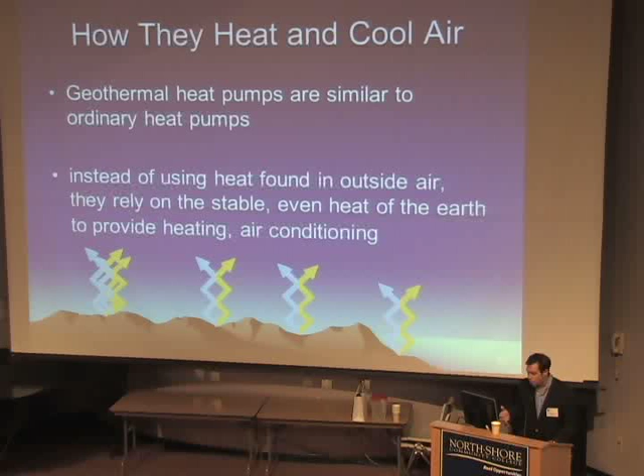You all are familiar with the frost line. If you've had anything installed below the frost line, an irrigation system, the temperatures below the frost line aren't subject to the same extreme stress of temperatures from the surface. So they're very stable, and they tend to be in this area about 50 degrees, about 10 degrees Celsius. So rather than bringing air from 0 outside to 68 degrees, and again, you can imagine the amount of energy that would take, we only now have to bring it from, say, 50 to 68. So far less effort and far less energy and far less cost in doing that. So that's basically what we're doing here. And it's also a technology that can use that stable heat below ground to cool homes as well as heat them.

So another added benefit is we talk a lot about burning fuel and fossil fuel and releasing carbon into the atmosphere, and that's a very finite resource, the amount of carbon, fuel, oil, and gas that we have on the planet. This doesn't burn fuel like a furnace, not at all. What it does, as I said in the previous slide, is it collects the natural heat through a series of pipes called a loop. There's open loops and closed loops, and we'll show some diagrams in the next few slides. And these are installed below the ground surface, where I mentioned we have a very stable, even temperature year-round, as opposed to the high fluctuations that we get in this part of the world, at least in New England, seasonally.

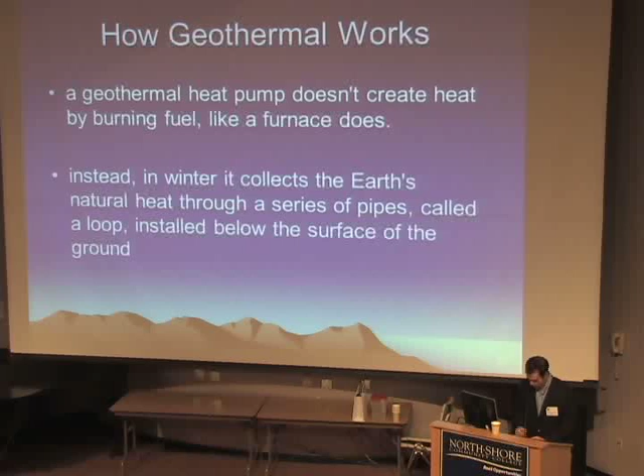So this is more of an overview of a typical system. This is a closed-loop system, horizontal loop, as you can see, installed in a home. And that green line is the ground surface. So if you think ground surface, grass, green line, below ground is where we have the majority of the components of this system. And then you have in the basement of the home the compressor and distribution system as well. And your loop on the right, that brown circular pattern, it's an odd-shaped pattern, is basically filled with a refrigerant, like ethylene glycol, antifreeze, essentially. And that's circulating through the coils. And what it is, it's drawing in heat from the earth and releasing heat as well at the same time.

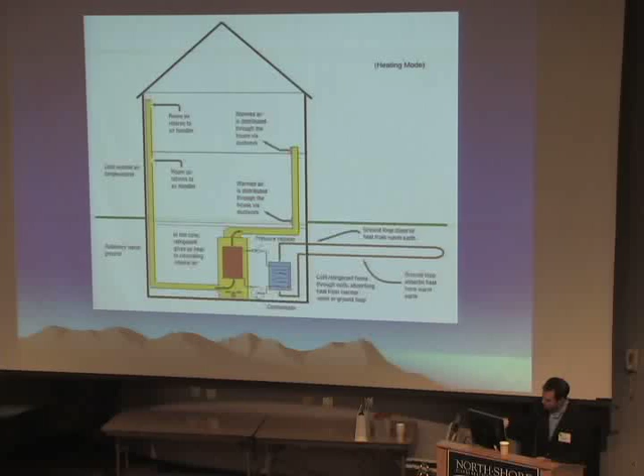Going through a system of compressors and ductwork, air is brought up to temperature from 50 degrees to say 68 or 70, with much less energy than a typical air-driven system, then released into the room and circulated back through. So this is a closed loop diagram of a closed loop system.

Let's try to put together an analog as to how these systems work. A great example is up in New Hampshire, the polar caves. Has anyone visited the polar caves? Yeah, it's fascinating. You can be there in July and there's ice in the cave. So why is that?

Well, it's stable temperature, very cool, year-round. In the winter you'll see a cool temperature in a cave like that, but in the summer it'll stay just as stable. The air underground is constant, cooler than the air outside, less subject to fluctuations. During the winter it's pretty much the same constant temperature, and that's warmer than the outside air. So this is the basic principle: you're drawing on that warmth, that reservoir of warmth within the Earth.

If you look even deeper into the core, mantle, crust of the Earth, you can see expression of that heat through geysers, volcanoes, some huge processes. We're not talking about that geothermal energy, that's a much more macro scale. We're talking about just the warmness itself of the below ground, the subsurface. So we can draw on that for energy, we can use that warmth for heating and cooling.

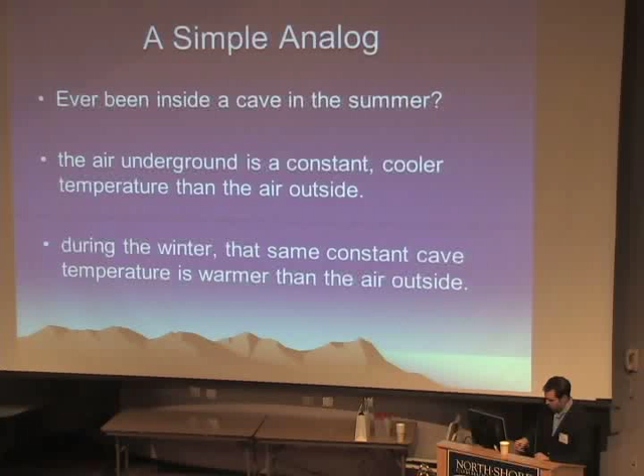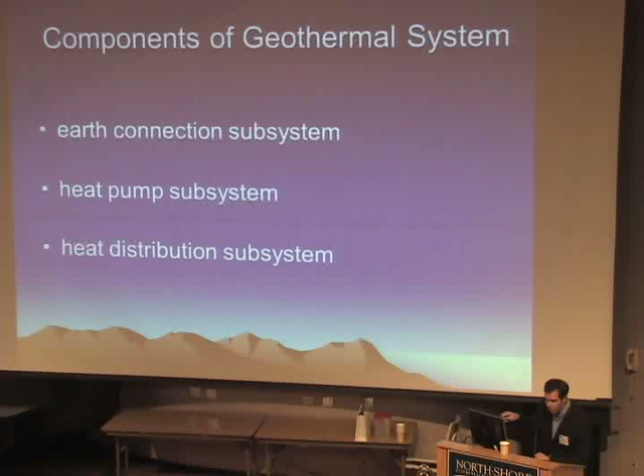So any geothermal system needs to have three components. There needs to be an earth connection, and we showed a loop system in the previous slides, that could be wells or a horizontal system. Then you need a heat pump, a subsystem in the house, and then a distribution system to actually release that heat or pull that cool from the house and circulate it back into the system. So three basic components.

So let's look at the first one, the earth connection. We're using the heat of the earth as a sink or a source. The sink is a release and a source is a place to pull heat from.

And we do that through a series of pipes, which we call a loop, buried beneath the ground near a building to be heated or cooled, to be air conditioned or heated. Some of the temperatures we look at underground could be 45 to even as high as 75, and it tends to be in that zone. Around here we're about 50, 51, maybe a little bit 52.

So it's very constant during the year. And that is really the main feature of geothermal, that we can draw on that constant heat and cool buildings and heat buildings from it, and require far less energy to bring heat up to temperature.

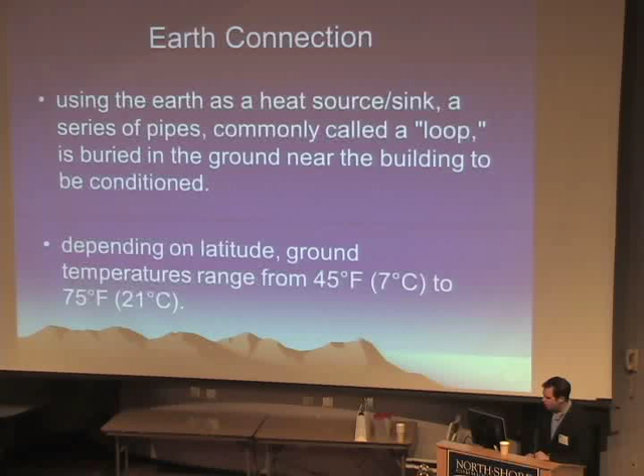So here's a couple of slides of typical systems. And the loop itself can be buried underground horizontally or vertically. You see horizontal on the left. That could be for a typical home, again below the frost line.

And on the right is the system that's installed in the new building here. That is a vertical system where you have a series of deep wells that are drilled, in which you have coils installed in a loop fashion to collect the heat from each one of those wells at depth and then relay it back into the building. So they both are similar in principle of operation, except there's extreme depths involved on the right, and we're talking as much as 500 feet deep with the vertical system.

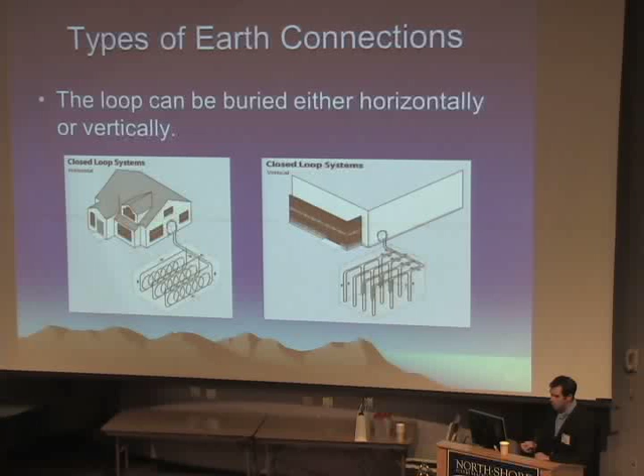As we saw in an overview slide, the basic system uses a fluid. It could be water, but here in colder climates we use an antifreeze, an ethylene glycol, that acts as an absorber of heat or releaser of heat. So we talked about sources and sinks to the soil, and depending upon whether the ambient air is colder or warmer than the soil, that's where we get either release of heat or absorption of heat.

So ambient air is just the general outside air temperature. If I was to say the ambient air in this room, it would be 70 degrees.

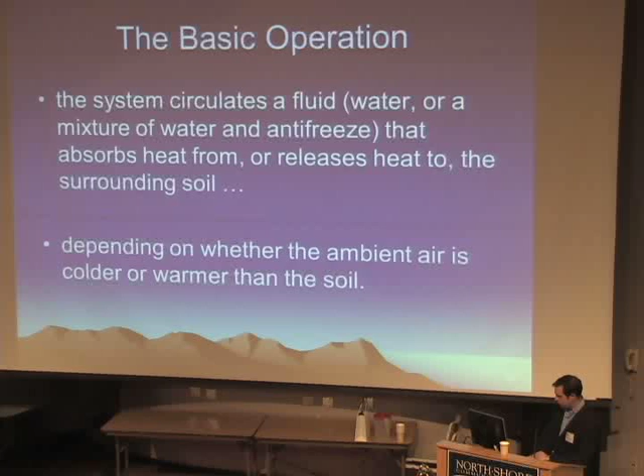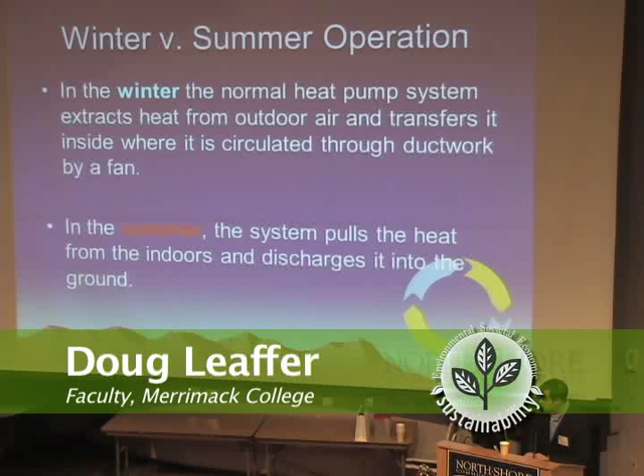So here we have two frameworks of operation. In the winter, we're extracting heat from the outdoor air and transferring it inside, where it goes through ductwork by a fan. And if we have an air-driven heat pump system, we have to crank up the energy to get it from what would be 0 to 68. But with the groundwater heat pump system, we're only getting it from 50 to 68. And in the summer we have the reverse: the system actually pulls heat from the inside of the building and discharges it into the ground. So this is the loop that we're talking about.

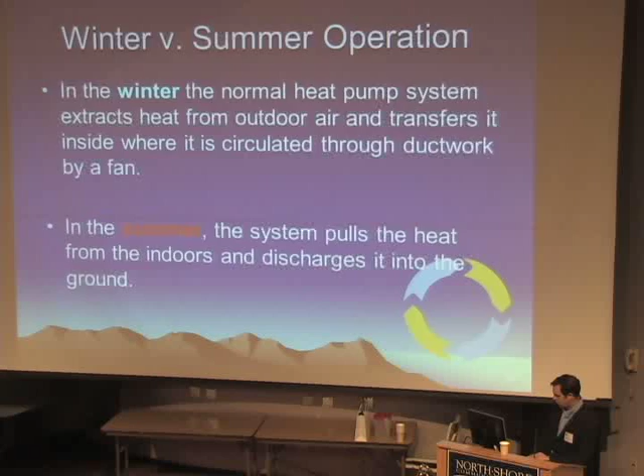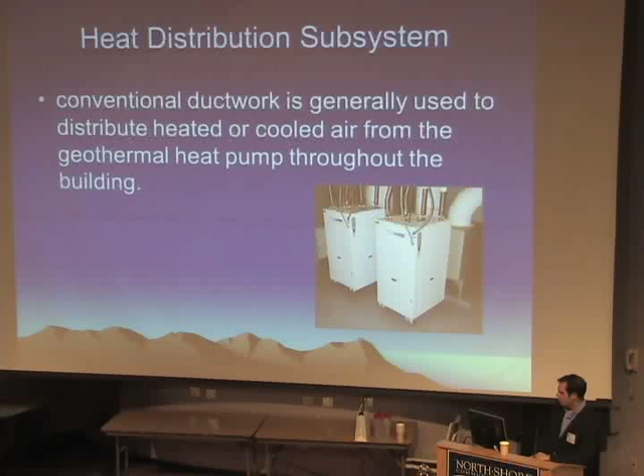What's really important to note is that these are very efficient. If you look at the percentage of energy used throughout the whole system, roughly 70% of that is coming from the ground. That's renewable energy. We're not burning anything, we're not adding any carbon to the environment. It's constant, it's available, and there's no cost to draw it from the ground other than your initial installation cost and your system maintenance cost and electricity required to run the system, but far less than conventional hot air pump systems.

So looking at the Earth's temperature, really that's what makes sense. This is very efficient, it's comfortable and quiet. It's a very sustainable technology. We talk about sustainability - this is a one-time installation, and you have this reservoir of heat to draw from indefinitely for the life of the components of the system.

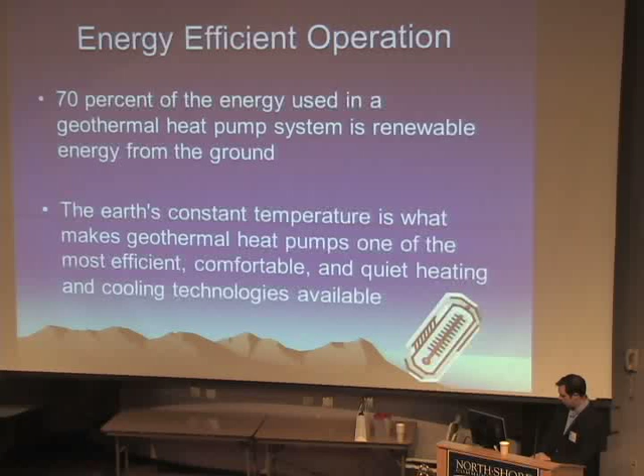So some facts, some statistics. According to EPA, geothermal heat pumps are now listed on the Energy Star program. You've all seen appliances that have an Energy Star rating, which means they have more efficient operation with electricity. Geothermal heat pumps are now rated under that system, and the EPA has estimated that users of geothermal heat pumps can realize some 30 to 40% lower energy bills.

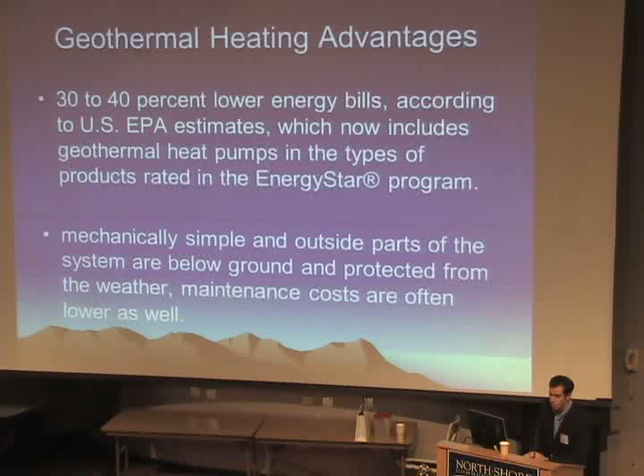So the other beauty of these systems is they're very simple, mechanically simple, and the outside components are below ground. So once they're installed, that's it. They're protected from weather, they're protected from damage, and maintenance costs for these systems are really limited to the interior components and would be lower versus other conventional systems.

So here's something I found in Oklahoma City. I looked for something locally but couldn't find anything as an example. This is a 3,000 square foot home, and their average electric bill is $60 a month using geothermal heat pumps. Very cost effective - this is very much in line with the folks we talked to outside.

So in this part of the country, the ground temperature would be probably in the 60s. Below ground, the groundwater temperature would be approaching 70. So you can consider that as a different reservoir of heat, unlike here. If you have to cool that, then it's actually probably very efficient to do that.

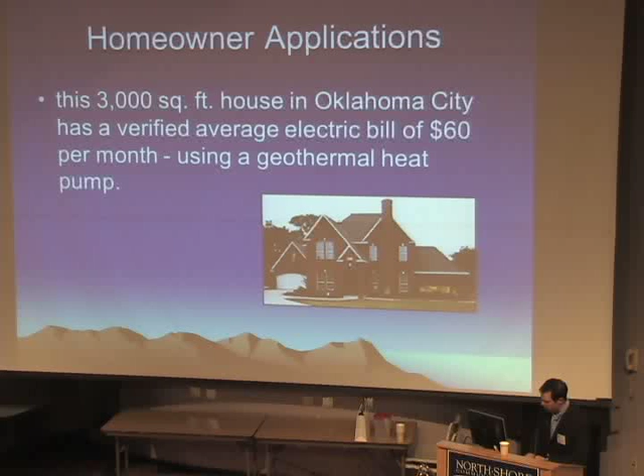So we talked a little bit about costs and energy costs and how much bills are per year. You really have to consider a few things. The cost of drilling is a capital cost, an upfront cost that needs to be considered, and that has to be added to the project. We're talking about deep wells in some cases, 4-inch diameter wells. This is the expensive part of the project.

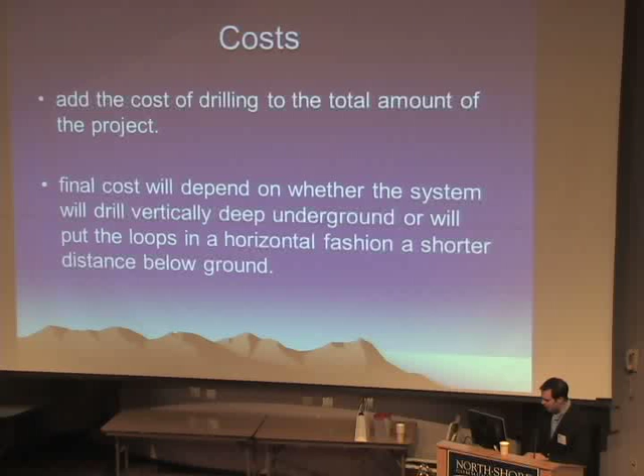These are typical well depths. These are drilled deep into bedrock, and the temperature of the formation around here is about 51, which is a typical groundwater temperature. It's going to stay that year-round, might fluctuate a degree up or down. That's why this is so effective - there's not a lot of variance here. It's very stable at that depth.

And I have a statistic on thermal conductivity: 1.5 BTU per hour per foot per degree Fahrenheit. So those that know something about energy can do the calculations and realize what kind of energy you can get out of this type of installation.

And the rock itself is called rhyolite. It's like a granite, essentially. That's first encountered about 140 feet below ground surface. So above that is fill and glacial till and other materials. And of course there's a water table. But we're trying to draw from that heat, the reservoir of heat in the rocks. And that's what we're doing here.